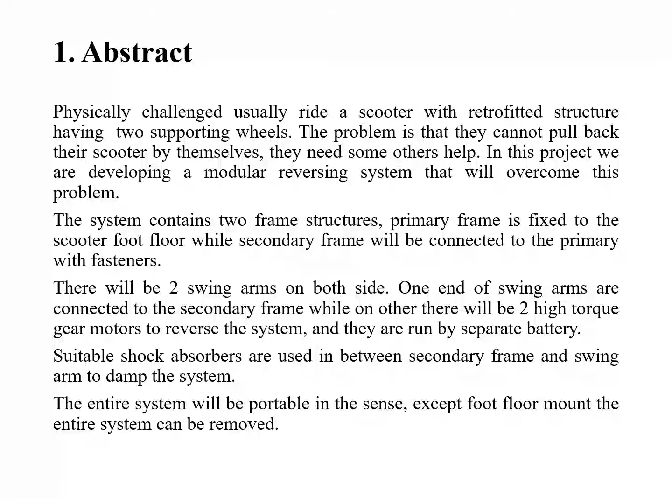Coming to the objective, the main objective is to design a modular reversing system that is suitable for the scooter. We are using the TVS Jupiter for our project, and we designed every component according to the scooter, that is the Jupiter. Next, structural analysis of the designed parts for the factor of safety.

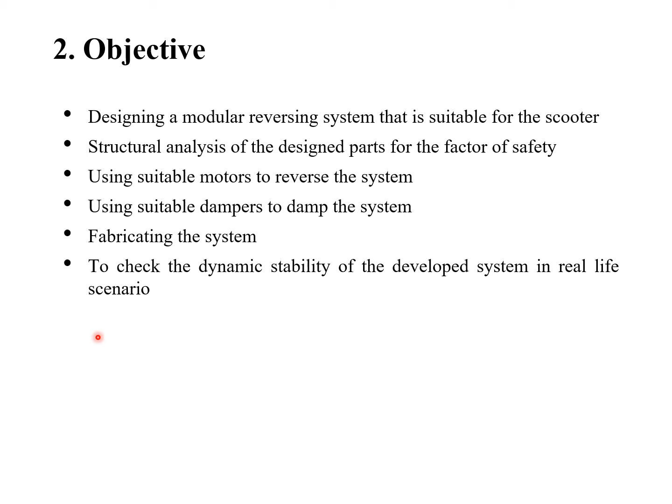Next, using suitable motors and a damping system, that is a shock absorber, for the system. Next, fabricating the entire system according to the design. And at last, to check the dynamic stability of the developed system in a real life scenario.

We followed these methodologies for completing our project: design, analysis, fabrication and testing. First, in design we have to design the frame structures and swing arms. Next we have to calculate the shock absorber parameters for selecting a certain shock absorber. Same with the drive system, we have to select the motors according to the calculation. Next, analysis. We should do the structural analysis of frames and swing arms for the factor of safety.

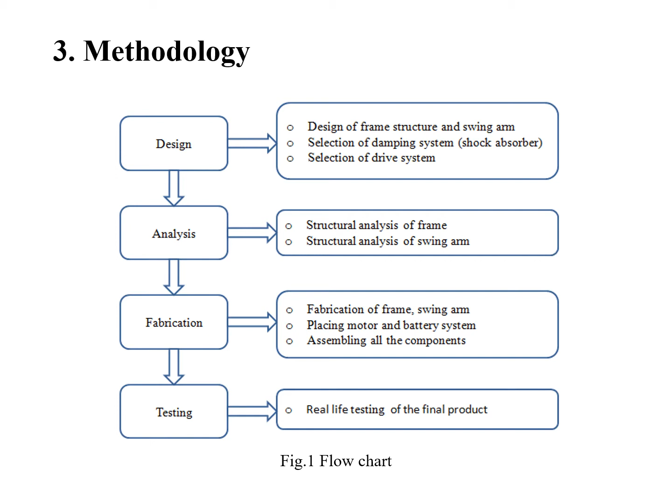Next, fabrication. First we have to fabricate the frames and swing arms. Then the shock absorber mount, battery mount and motor mount should be done, and all the assemblies. At last, testing. We have to test the entire system in a real life scenario.

Coming to the fabrication of the frame structure, there will be two types: a primary frame structure and a secondary frame structure. In figure 3.1 you can see the primary frame structure with the two clamps, and in figure 3.2 you can see that two points are clamped to the foot floor mount. We are using two of the primary structures, on either side, and these are made of mild steel, and this structure will be fixed to the scooter.

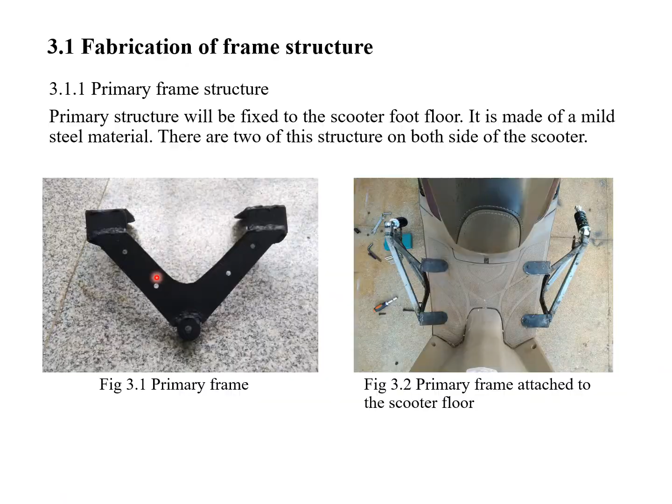The secondary frame structure is made of three rectangular tubes of mild steel, as you can see in figure 3.3, and there are two mounts: the upper mount will be used for the shock absorber mount, and the lower mount is used for the swing arm. In figure 3.4 you can see that the entire secondary frame is connected to the primary frame with fasteners.

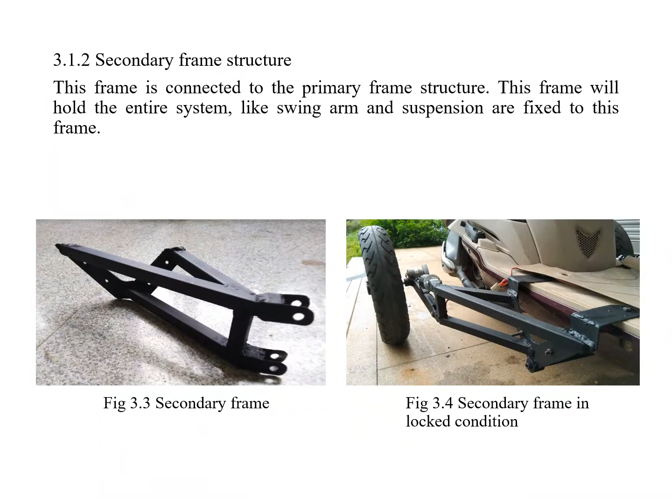Next, the swing arm. It's made of a rectangular tube, and this end, as you can see in figure 3.5, will be connected to the secondary frame's lower mount, as I mentioned in the previous slide. There is a mount for the shock absorber in the middle, and in the rear the motor is mounted.

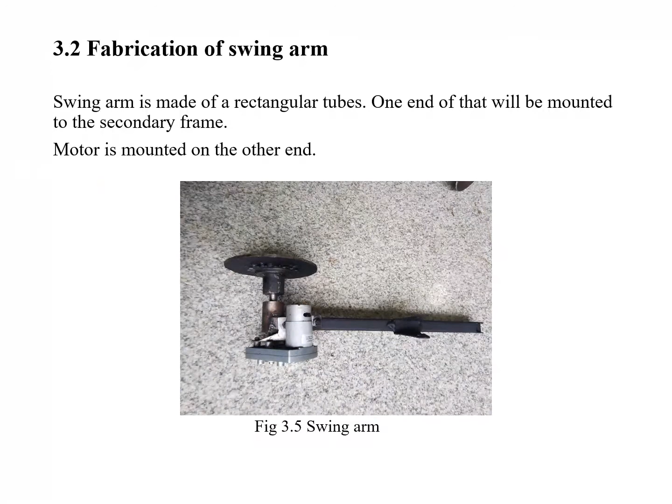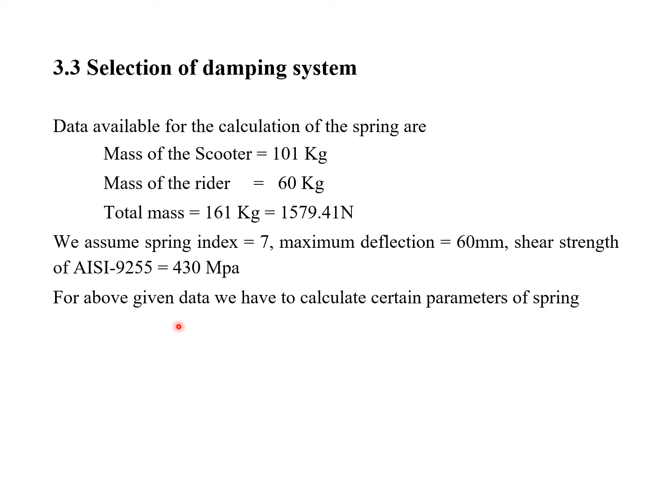Next will be the calculation regarding springs. The main data is the total mass of the system, and some others are assumed, like spring index and maximum deflection. From these data we have to calculate certain parameters of the spring. We got these values for spring parameters: stiffness of 26.2 Newton per millimeter, shear stress factor K of 1.07, number of coils should be 8, and free length should be more than 145.

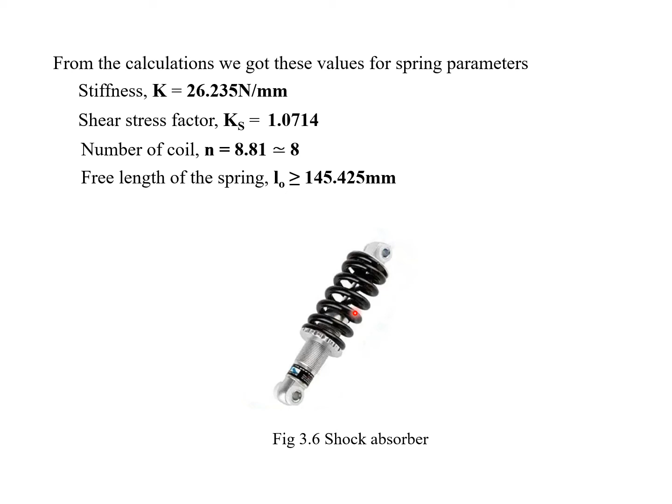The figure below shows the shock absorber which we have implemented in our project. The free length is around 165 and there are 8 coils. This is best suited for our project.

Will be selection of drive system. We need high torque gear motor for reversing of scooter.

Accordingly, calculations are done. To cover 1.5 times the distance of the scooter, the time required will be 5 seconds. According to that, the force required to pull back the scooter will be 177.9 Newton. It will be shared by two motors.

Hence, the torque required for a single motor is 3.5 Newton meter, and for two motors it is required 7 Newton meter torque to pull back the scooter.

In figure 3.7 you can see a high torque gear motor with 30 rpm and 80 kg centimeter torque. It is around 7.8 Newton meter torque. It is more than enough to pull back the scooter.

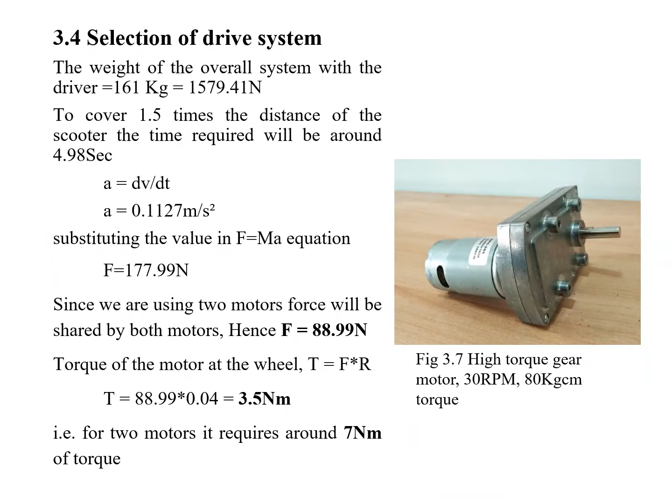The drive system: the motor is fixed to the swing arm end, and there is a circular solid piece with the center hole welded, as you can see in the figure, welded to the swing arm end. One shaft is press fitted to that welded part, and to that shaft the motor shaft is fixed, and we have welded one ratchet to get motion in one direction only.

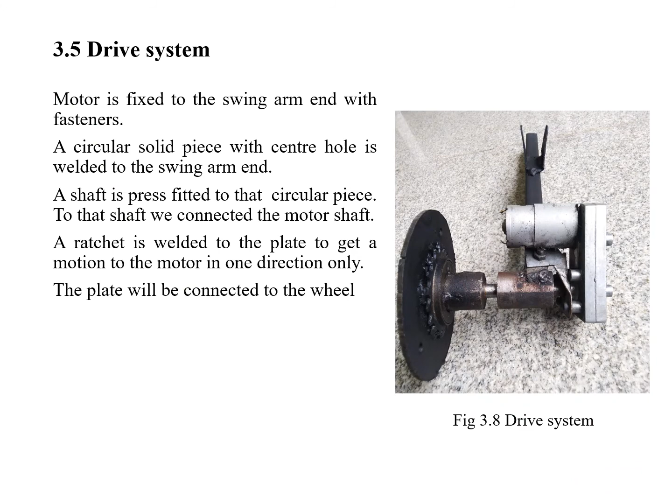Analysis is done in CATIA V5 software for a factor of safety of 1.5, and we applied a force of 3200 Newton to the shock absorber mount, as we can see in figure 3.9.

From the analysis, the maximum von Mises stress is around 251 MPa, which is less than the yield strength of mild steel, that is 370 MPa. The maximum displacement is 0.506 mm.

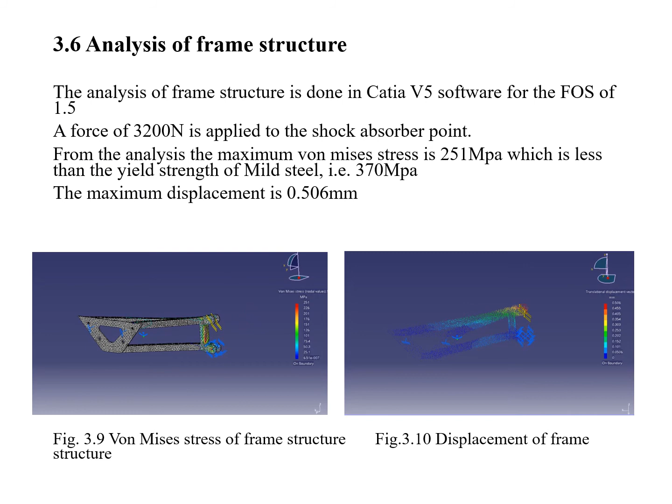Next will be analysis of the swing arm. In figure 3.11 you can see that 3600 Newton force is applied onto this end of the swing arm, and the other end will be fixed. The maximum von Mises stress obtained is 339 MPa, and the maximum displacement is around 3.6 mm.

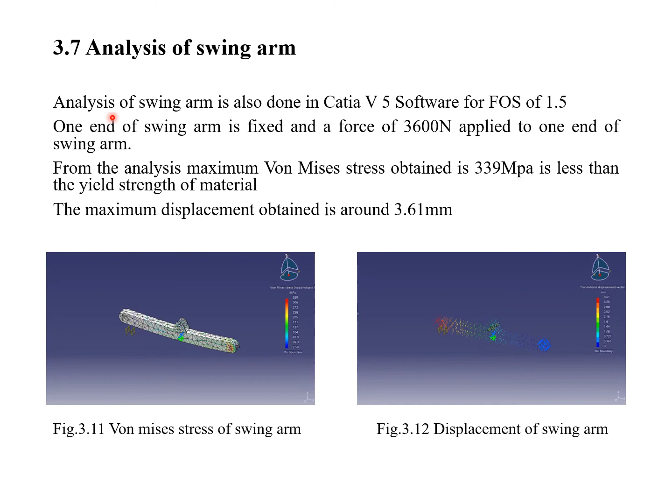Fabrication: at first the frames are fabricated, the primary frame and the secondary frame, and checked with the scooter configuration for any errors. Then we proceeded with the swing arm mounts, shock absorber mounts, and the motor mounts.

Motor should be rigidly fixed because it has high torque. Next, weldings: we used arc welding for every welding part, and that's all with the fabrication.

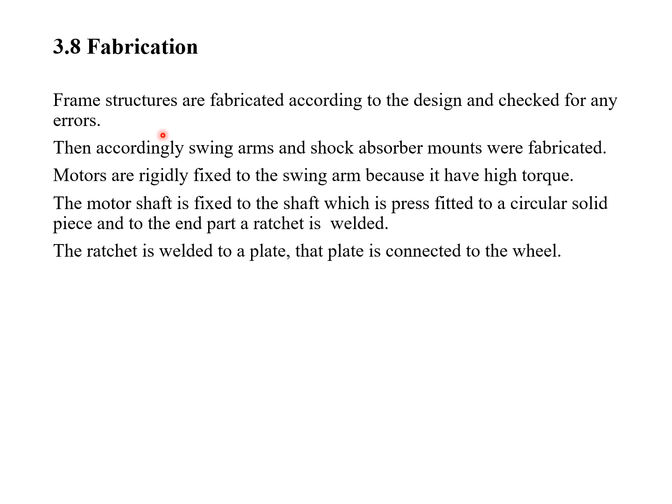Coming to the motor actuation, we are not using any separate battery for this system. The power to the motors comes from the scooter battery only.

Coming to the electrical part, the two motors are connected in parallel across the battery. And next, we provided a push button, as you can see in figure 3.13, a red push button for actuation of motors.

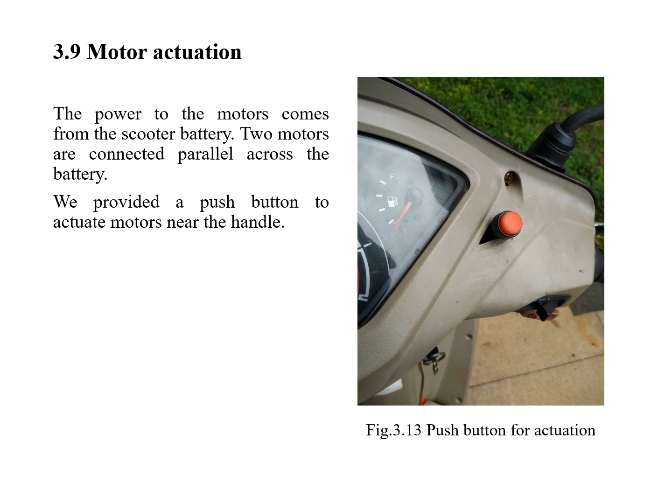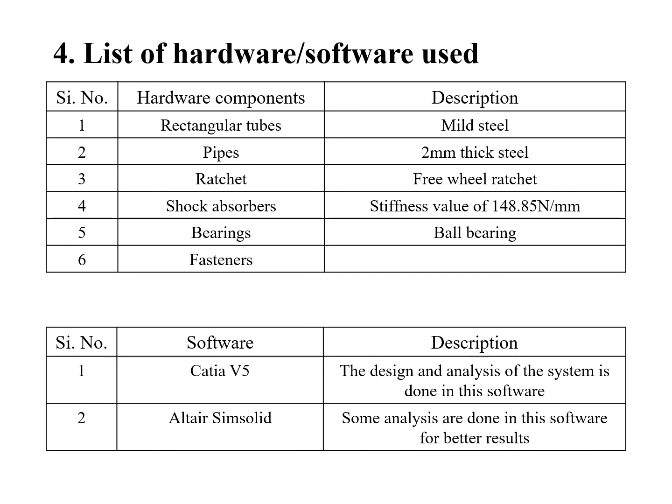Next, result and discussion. The von Mises stress obtained from stress analysis of the frame is around 251 MPa, which is within the yield strength of the mild steel material, 370 MPa. Hence the system is safe.

Then suitable shock absorbers are used based on the calculations. And an MFC 555 12 volt 30 rpm DC motor with 80 kg centimeter torque is used for the system to reverse the scooter. The overall weight of the system is around 15 kg, much lesser than the traditional assistive system. Actually, it is half of that traditional assistive system, which may be around 30 kg.

The developed system is stable in real life scenarios. This will be shown in a video.

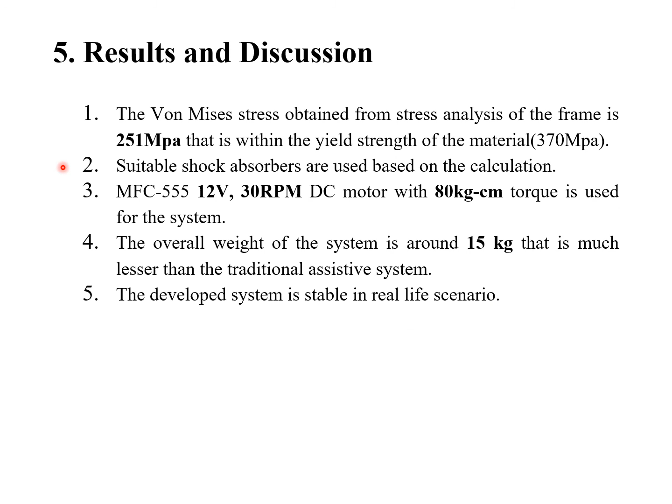Final project model. In figure 6.2, you can see the modular reversing system fitted to the scooter. From the figure you can see we are not using many complicated parts here. A simple design to support the scooter and also to reverse the scooter.

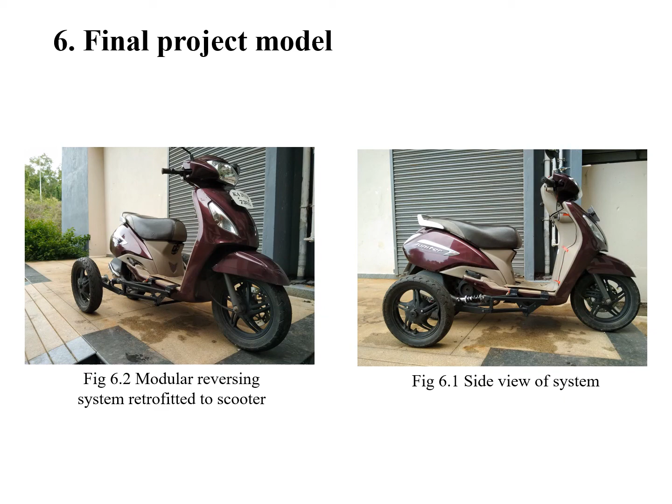Next will be societal relevance. The developed modular reversing system will reduce the disabled person's dependency on any other individual. They need not call any other person to pull back their scooter. They can do it themselves. Working on their own will have a positive impact on their life.

And the third point is very important. The physically challenged people, most of them are middle class people. They hardly own one scooter for themselves, and other family members cannot ride with the retrofitted scooter. So our system is modular. If any other person wants to ride, the entire system can be removed without much struggle.